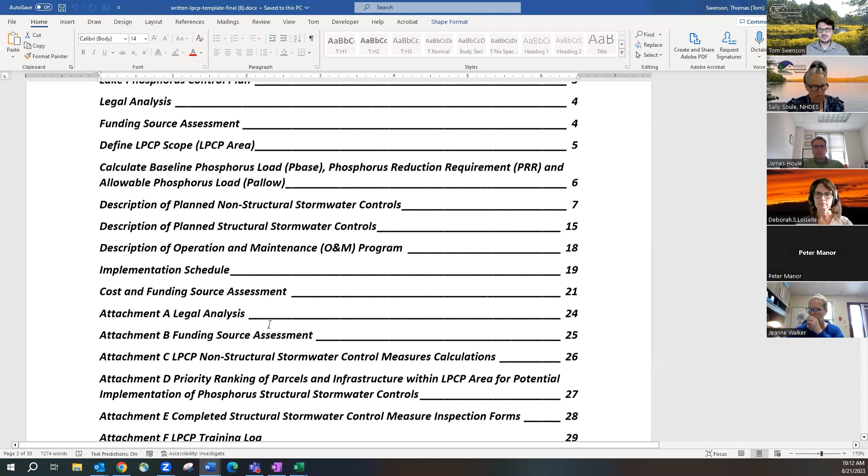And then we have our table of contents. And I wanted to point out in the table of contents that there are several attachments that we're going to ask you all to put with your LPCP, and we will reference them as we go through each of these requirements. But I wanted to let you know that there are a lot of attachments for this. Don't panic because we have resources for all of them, but we just want to make sure we're giving EPA everything that we have. And then again, there's that list of communities that are required to make LPCPs because they have phosphorus TMDLs.

It's also important to note that any red text within the template is either instructions or important information. This is just to give you some background information and to make everything easier for all of you. And we'll go into that more. This red text can be deleted once you're done with your LPCP template, or it would really just be your finalized LPCP plan. It can just get deleted from there. But for now, it's just there to give you all instructions and additional information.

Also throughout the LPCP, we're going to be using the terms non-structural stormwater control measures and structural stormwater control measures. These are the same things as BMPs, but we're just calling them stormwater control measures because that's how they're referred to in Appendix F. So we just wanted to make sure that we refer to them the same way within our template to make sure we're using the permit language.

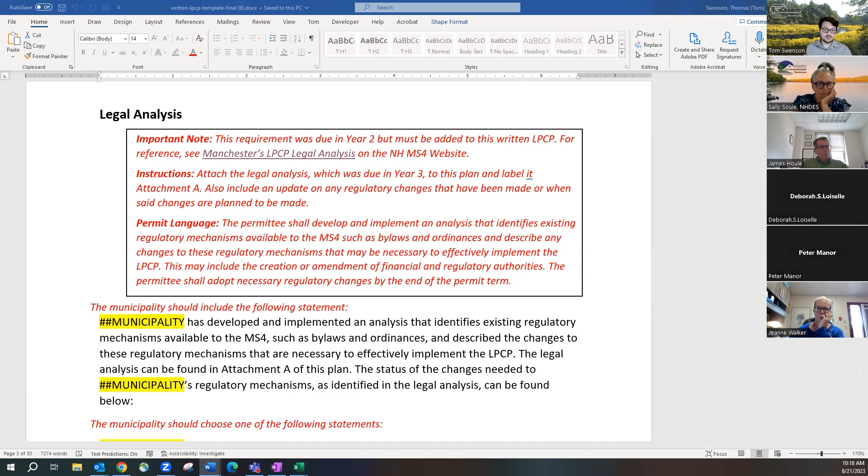And this legal analysis looks like this. It's on the MS4 website. You can follow it on the link. It gives you a good starting spot, and you can see what another community has done. So just a little background information in case you need it.

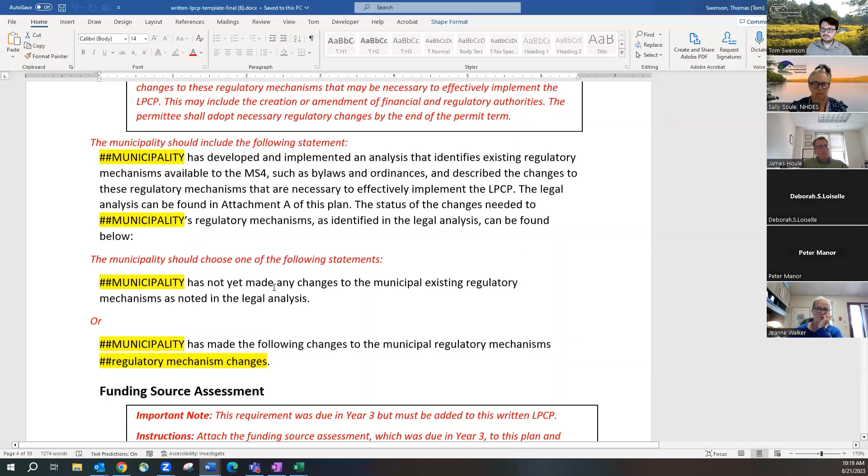And then we move on to the funding source assessment. So the funding source assessment was due in year 3. It's another one of those requirements that had not been submitted yet, but now they want you to submit it. And what you're going to do is take your funding source assessment and attach it as attachment B to your LPCP plan. If you have not completed your funding source assessment, the requirements are very vague within the permit about what is actually required.

So our suggestion is you just take the information from the cost and funding source assessment, which we'll get to later on, and just put some of that information in there. We did a more in-depth cost and funding source assessment later on, but this was a requirement for year 3. So if you need to keep it vague, that's perfectly fine.

All right, any questions thus far about the legal analysis or the funding source assessment? Those were all things that were due in the past, but again, communities might not have had a chance to finish them. Any questions?

All right, so now we're going to move into the defined LPCP scope area. So the LPCP scope area was due in year 4. It was something that we had to finish last year, but again, we are now reporting in on it. Sally Soule is going to go over this in a second, but I just wanted to show you, there's 2 options for what you can do for your LPCP area, and you just choose the language down here for whatever option you choose. So Sally, I'm going to throw it over to you to explain more about the 2 options.

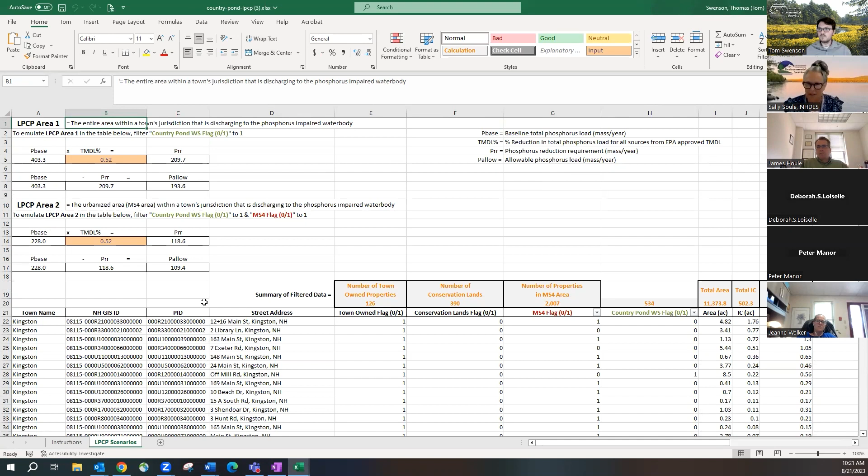Thanks, Tom. And Jamie can weigh in on this presentation as well, but the MS4 permit asks you to do two things. It asks you to choose an area in which you plan to implement your MS4 activities. And then, set some pollutant load reduction goals for tracking those implementation activities over time.

So there's two area choices that you're offered in the MS4 permit. Each town that has a lake phosphorus control plan requirement has a spreadsheet that does these two area calculations for you, so that you can see the numbers, so that everything is quantified for you to help pick which area you want to use for your LPCP area.

So when you go on the website and go to your town, you will see a link to this particular spreadsheet for your town. And Tom, remind me, what is this spreadsheet called? I think it's called LPCP area. Yeah, scope, LPCP, scope and calculations. Okay, great, thank you. So everyone who's got this requirement has one of these spreadsheets.

This is all based off of the hotspot data that UNH developed, that you've seen and worked with and loved through the years. So this information should look pretty familiar.

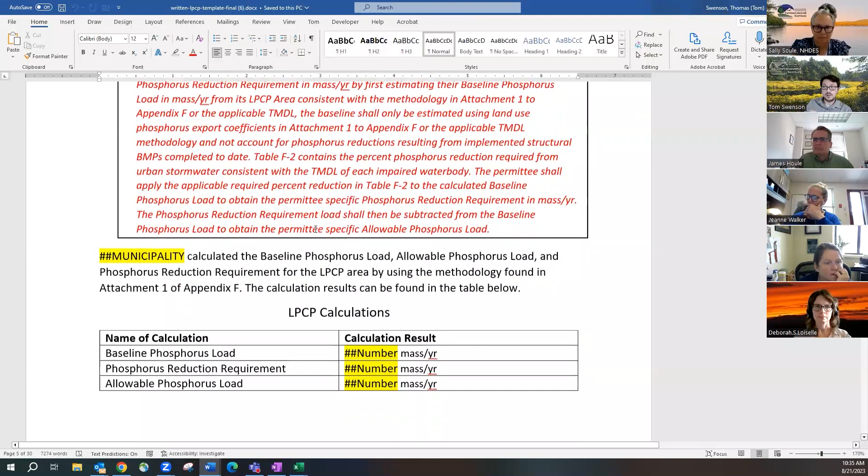For the calculations that Sally mentioned, that is the next requirement, which is to calculate the baseline phosphorus load, phosphorus reduction, and allowable phosphorus load, which is P-base, PRR, and P-allow. We do have a link to the permittee specific page telling you where to find this information, and once you find that, you're just going to put it right in here. So again, this was a year 4 requirement, but you want to make sure that you're putting your calculations in here so EPA sees it, and you just steal those directly from your spreadsheet.

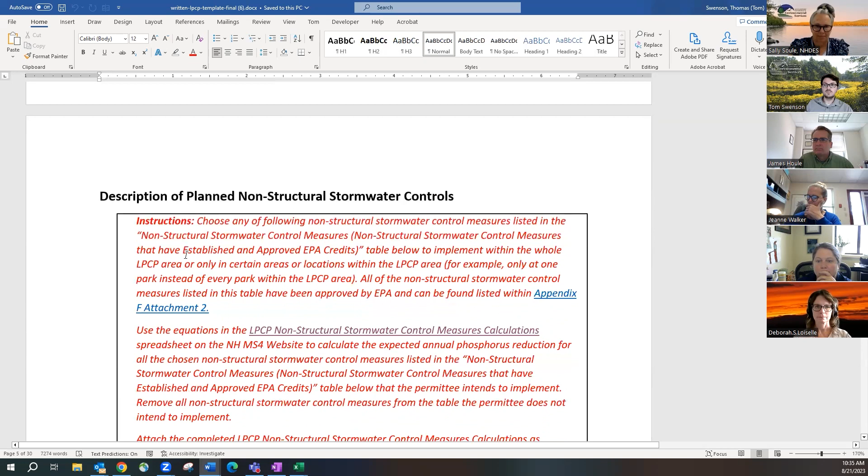All right, now we're moving into the newer things that we developed for this year, and this is where there's going to be a lot of discussion, and we're hoping to hear from all of you. So the next requirement is the description of the planned non-structural stormwater controls.

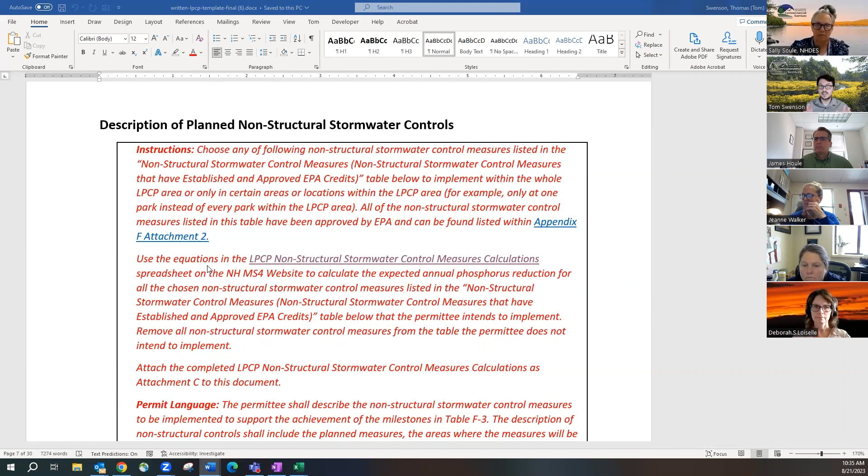As Jamie mentioned, everything we're doing is based off of what's in the MS4 permit, more specifically in Appendix F. All the non-structural controls come from attachment 2 of Appendix F, and we'll get to some more of those caveats in a second. Jamie's about to go through a spreadsheet that we have linked right here that has all the calculations he's about to show, and you're going to want to update that spreadsheet with all the calculated information and attach it as attachment C to this document.

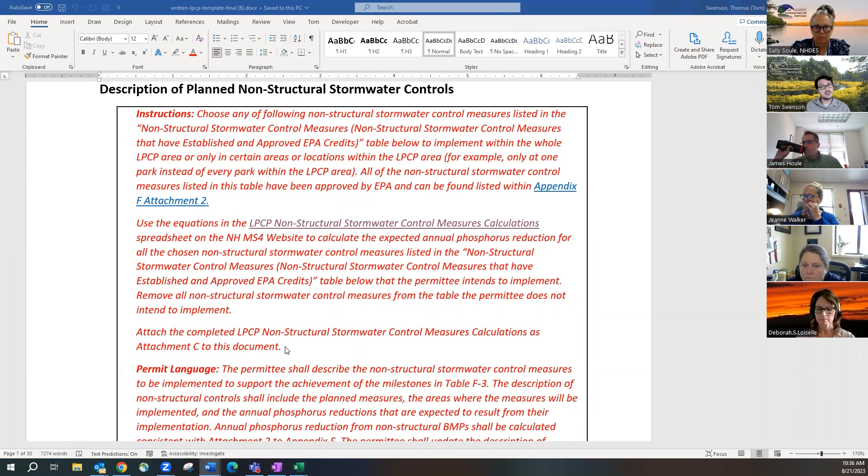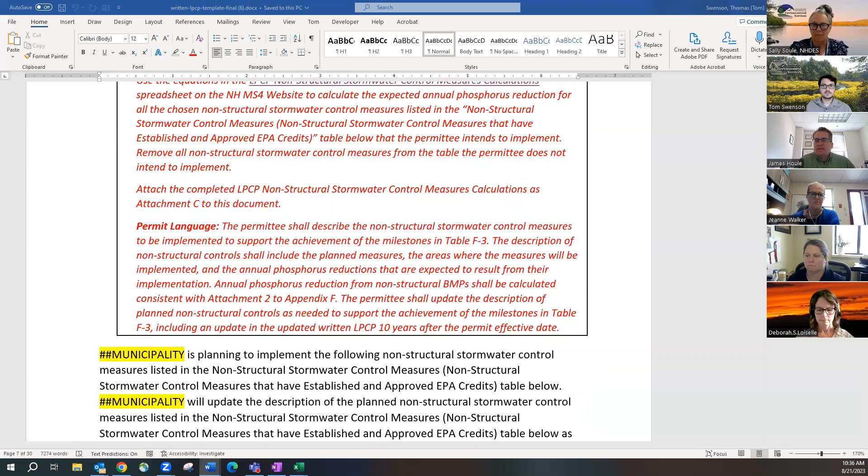So once you update your spreadsheet, make sure you save it and attach it to this document. And then once Jamie goes through everything, I'll go through the template itself and show you where to put all this information. Hey Tom, before we go into the non-structural stuff, can you go back to either Country Pond or Amherst? It doesn't really matter to me. That spreadsheet, yeah, just scroll down so we can look at the parcels.

So on the structural side, and it's possible we were getting here, all the baseline information is developed based on the existing land use conditions.

That PLO is kind of the background. And we're really trying to target the manageable phosphorus load. And when we talk about manageable phosphorus load, we zero in on impervious cover, because what impervious cover represents is the most amendable part of that load scenario.

We're not talking about going into, you'll see on some of these areas that conservation land has a phosphorus export. A forest has a phosphorus export. That's all part of the PLO. Nobody's asking you to manage the forest. What we're really focusing in on is the impervious cover and using non-structural strategies to supplement structural strategies that will be based on specific parcels.

And so what we've done here and what you're seeing is we've ranked the parcels in numerous ways. First of which, you'll see a town-owned flag. So town-owned lands have been marked. This is based on the best available information.

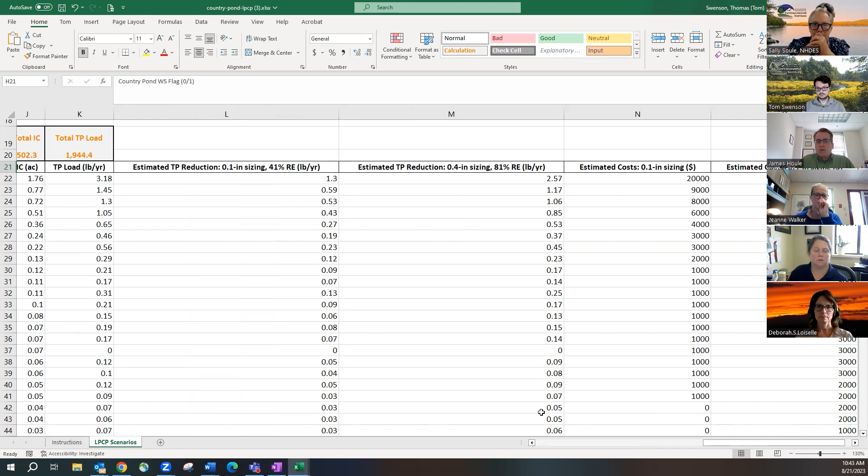We've been told, a DOT will tell us, your costs stink. And I completely agree, for a DOT these are low level costs. What DOT needs to do, because most of their implementation is going to happen in a highway setting, they're going to need a police detail, a traffic detail, and all the associated permits. They're not going to get away with anything.

So what we tell DOT is take this base cost and add a multiplier. If that multiplier is 2, great. If it's 10, which is probably more likely, that's how you begin to calibrate these costs based on your potential costs. So this is a starting point. As you implement these BMPs and say, wow, these were off by a factor of 2, now you add a factor of 2 to the future costs. So it becomes part of an adaptive projection.

So that's how we're really advising you deal with the structural controls. Create a list, and obviously for Appendix F, because you have a TMDL, it's a much higher bar. So in 15 years you're looking to get as close as you can to that reduction requirement.

So you're going to likely have to treat a larger percentage of your municipally owned lands. If you're under Appendix H for the nitrogen source identification report and the phosphorus source identification report, we do a projection and estimate of what you should be managing. So if you manage the top 10 municipally owned parcels, then you're managing 91% of the available impervious cover.

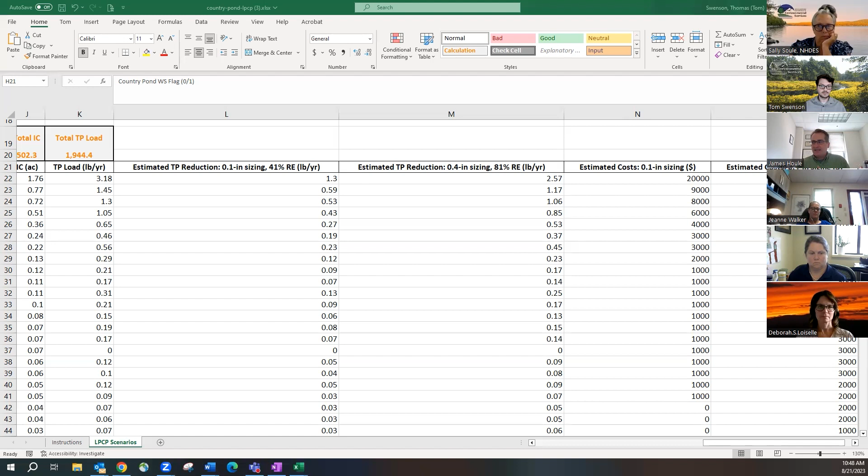The short answer to your question is, if we don't have credits that are existing, then we need to start working on these things. And that goes into the bin of future work products. We're taking this seriously. The way we're looking at it now is you have enough in the creditable section to get started, and when you're looking at implementation, pick off a couple of structural controls, put that in your plan, retrofit a couple of your municipally owned lands. That can only help, and it can demonstrate work towards TMDL compliance.

When you look at non-structural controls, we'll talk about the top ones that have credits now, where there's no real downside to maximizing the benefits. But there's also a later list of things we think will eventually get us across the finish line but have no existing credits, like septic system retrofits, which we're working on right now, or phosphorus inactivation, which is a whole new territory. It's not that you can't put that in your plan. EPA allows you to put things in your plan, and if there are projections for those load estimates, reference those studies and sources. If that's something you're serious about, by all means put it in your plan.

What we're talking about now would be the low-hanging fruit, the beginning of the journey—structural controls that have credits and non-structural controls that have credits. And Jamie, when you say 'have credits,' you mean these are credits outlined in Appendix F of the MS4 permit, so those are the credits EPA already considers legit.

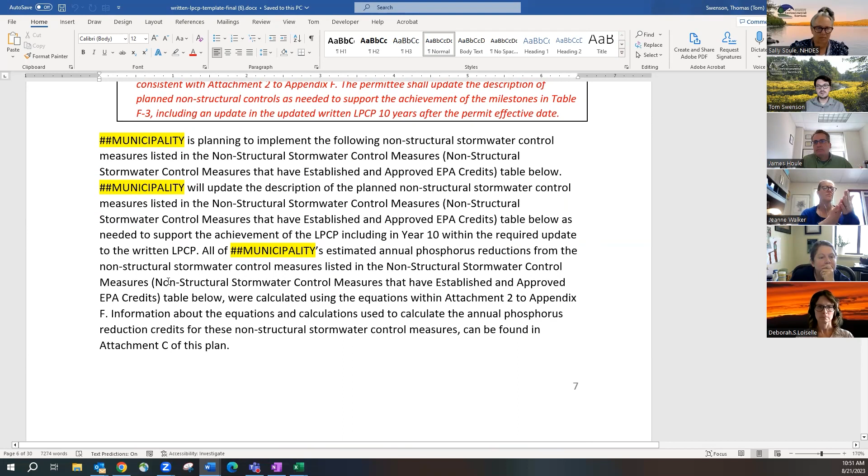With what Jamie just went over, we have this list of the first category of EPA approved or already authorized credits, which are catch basin cleaning, street sweeping, leaf litter management, turf grass fertilizer management, and impervious disconnection. If you go into the template itself, in the non-structural section, you'll scroll down and this first paragraph explains how we chose these non-structural controls, that they have EPA approved credits. You'll see a table with all the potential non-structural stormwater controls, or BMPs—interchangeable terms here.

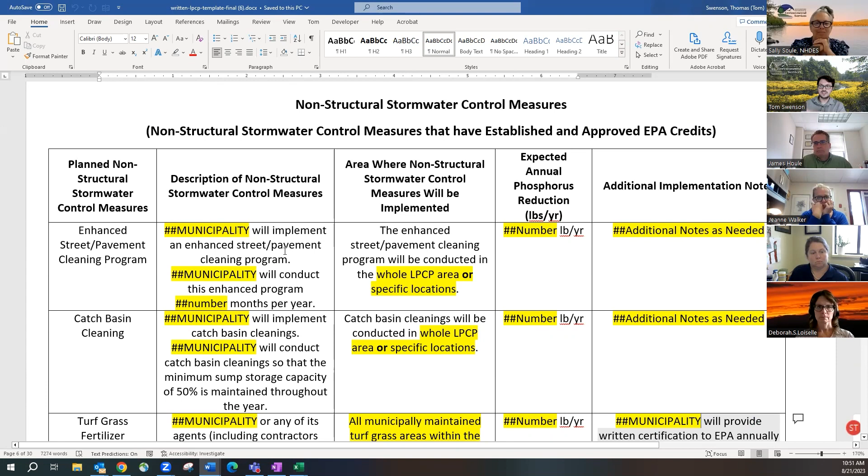There are a few more details for each of these you'll want to pay attention to, but you can choose which ones you're implementing. A lot of these might already be things we're doing within our MS4 communities, but we might just have to take the extra step. Like catch basin cleanings, for example, we're already doing that. The street sweeping program, you're doing that, but there are a few extra requirements there.

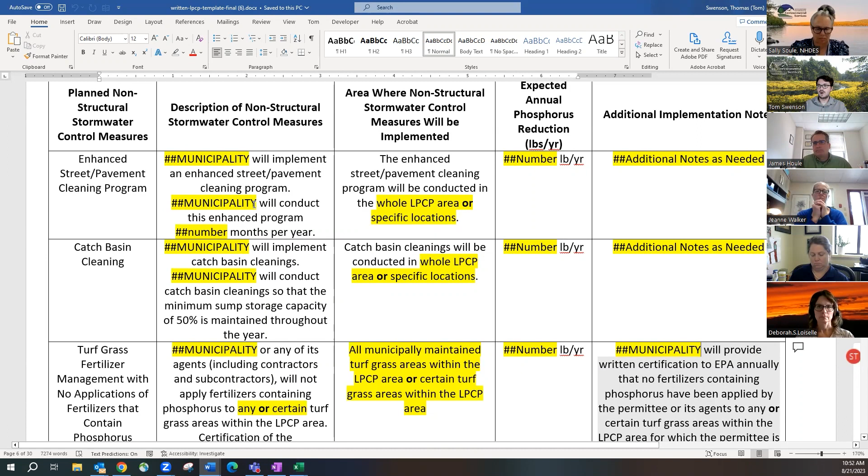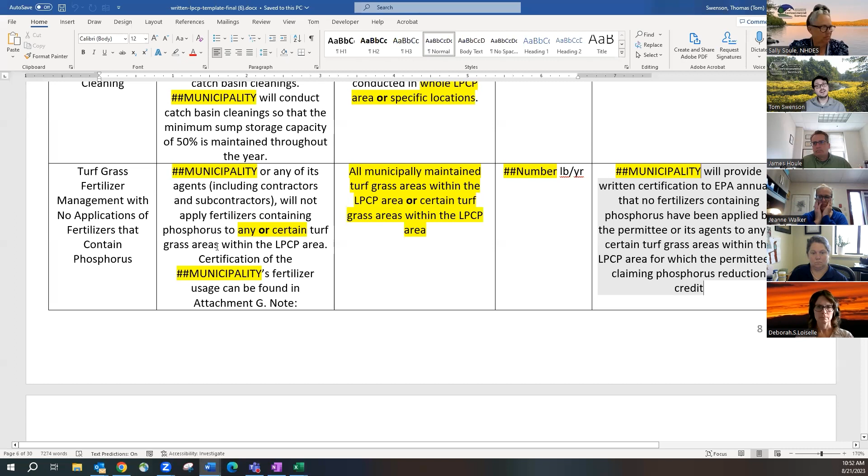I know a lot of us already have fertilizer SOPs in place or processes that say we're not going to use fertilizers that contain phosphorus. Well, you can get credit for that. As long as you're using a fertilizer that has less than 0.67% phosphorus, that's considered a fertilizer containing no phosphorus. So these are additional things you can get credit for.

And then, yep, so the leaf litter, all of that. And then also in the spreadsheet, Jamie was talking about those ones that are BMPs or non-structural control measures that don't have EPA credits attached to them, but we're hoping to get that in the future. So that would be the shoreline buffer, for example.

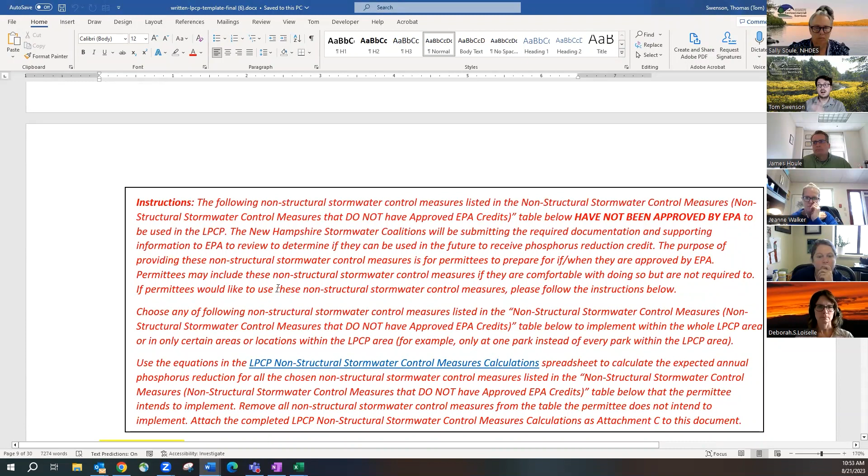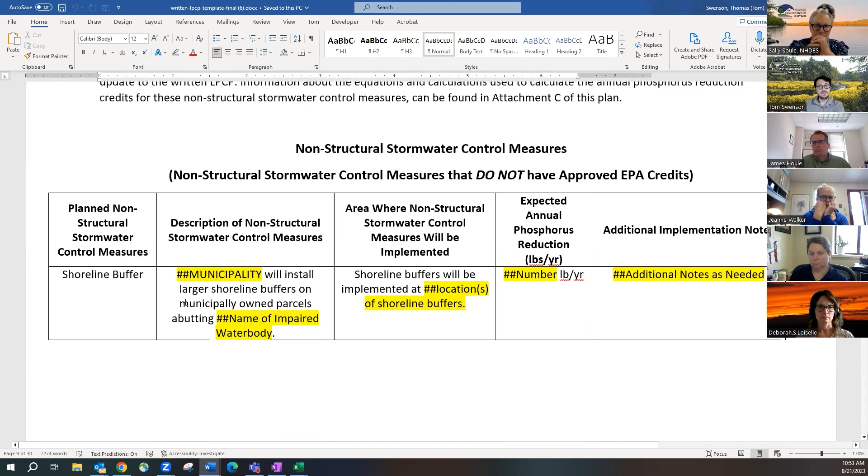And if you scroll down within the template, you're going to see another instruction screen talking about putting in those non-EPA approved non-structural control measures. Same text explaining why we're putting them in there, and then you could put the shoreline buffer in here. And then the last group.

Yep, sorry, Jamie. It's not a case where it's approved or not. It's just that they don't have established credits, right? So these types of things are known to reduce phosphorus, but there hasn't been consensus around an actual credit. Like, we haven't been able to develop consensus around what an outreach and education program does to reduce phosphorus, just because they're so varied and so diverse.

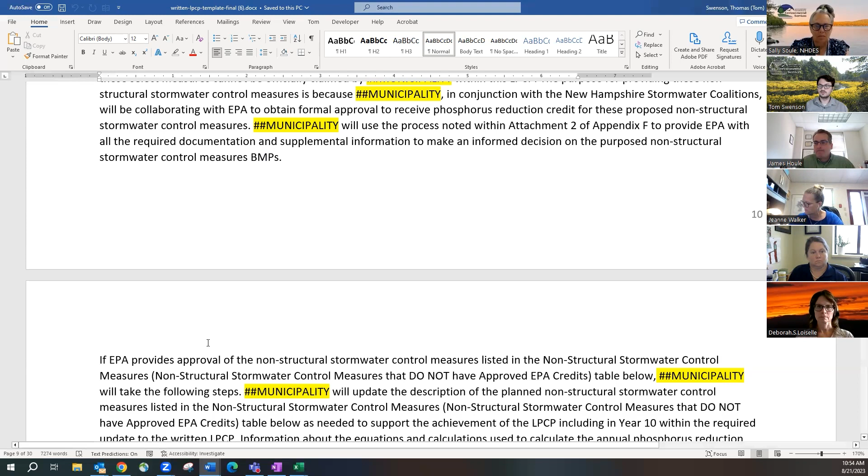However, if something holds promise and you really want to explore something, find those resources that are out there, propose a credit, and that's where you just have to get a little bit more creative. Yep. Yeah, and for the shoreline buffer, if you wanted to get credit in your LPCP plan for this, you would just have to submit data to EPA. And this is something that maybe we can look at within the stormwater coalitions too. If it's something we feel strongly about, we can pull that information together and submit it to EPA to make sure they approve of it.

And the last category, so there's 3 categories. There's the EPA approved, there's the not EPA approved but it has some sort of phosphorus reduction attached to it. And then there's this third category, which are not EPA approved and don't have a phosphorus reduction. But like Jamie was saying, we don't know how to quantify that, like for your septic system replacements and stuff like that. But it is something that you are doing, and EPA should see that you're putting the time and effort into. So you've got your pet waste education and outreach, your septic system education and outreach.

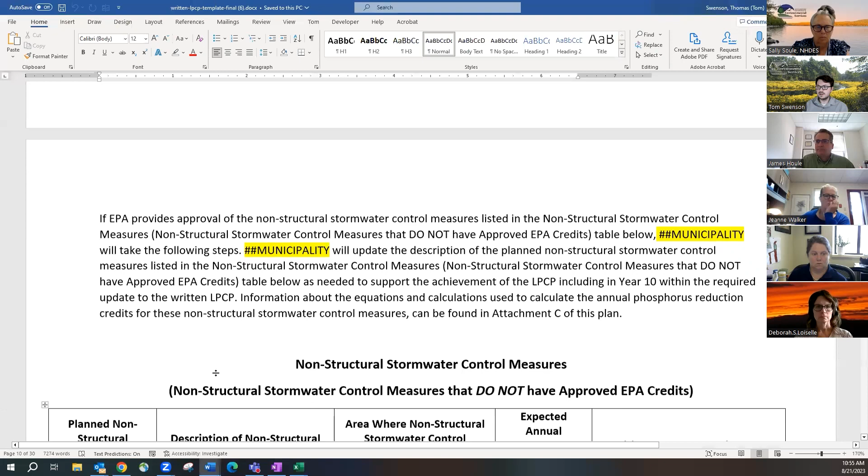If you're converting vehicles into electric, stuff like that, we have put another section down here that you can pick and choose what you want to do. There is no pressure. If you don't want to use these, it's completely up to you, but we wanted to give you the options, because if you're doing it, you should be getting credit, or at least make EPA aware of everything that you're doing.

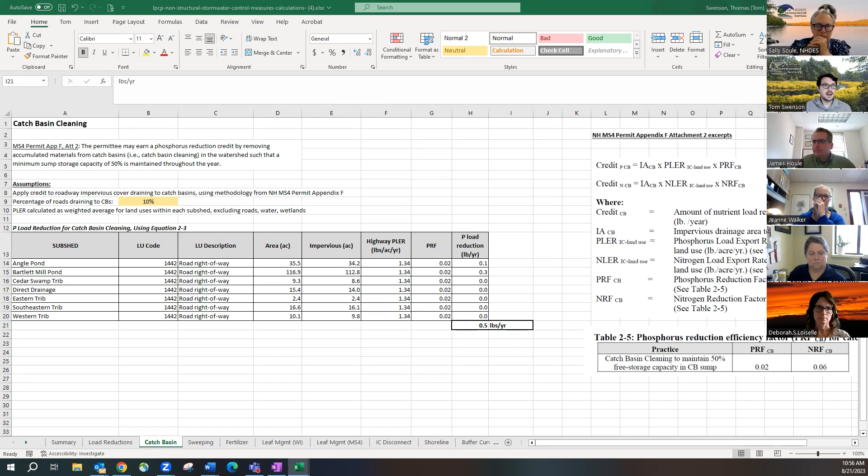Oh, and then the big thing, Jamie, can you go over the calculators? I just realized that was also in the spreadsheet. Yeah, so for non-structural, what we've added to that spreadsheet are the sources where we're getting the credits from. And for the most part, catch basin cleaning, those credits are outlined in Appendix F, and we're adopting attachment 2 of Appendix F.

We're adopting those. For the street sweeping credits, we have a new technical memo out on load reductions, phosphorus and nitrogen, from sweeping activities. And we've referenced that in that spreadsheet. We have a technical memo that you can read that tells you exactly how to calculate it. We don't have anything currently as slick as the structural control calculator. That's just a lot easier. There's a lot more information needed on the non-structural side.

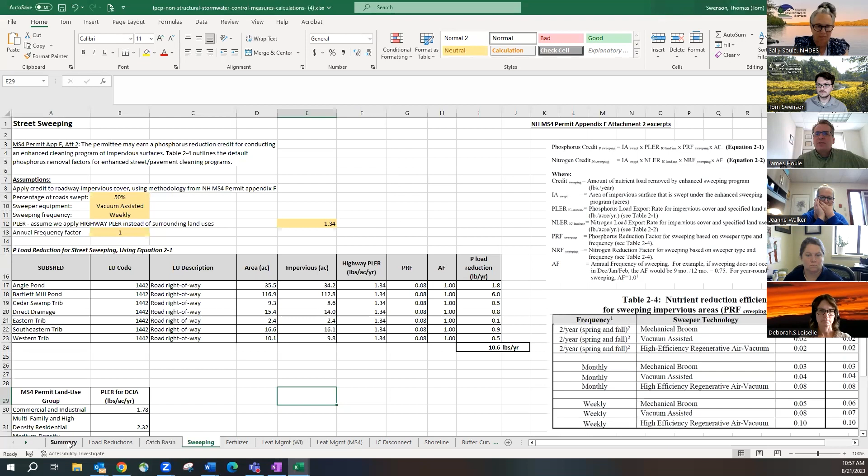So again, catch basin cleaning, pretty easy. You need the number of catch basins cleaned or the drainage area associated with the catch basins cleaned. And we're following what's outlined in Appendix F to calculate that. So we're using those standard pollutant load export rates and the standard reductions associated with that BMP.

For street sweeping, it's gotten a little bit more innovative. We now have an updated model credit and an updated measured credit. So if you pick it up and you can estimate the volume, you can get credit for the load reduction for fall seasons and non-fall seasons. So unfortunately, we don't have a slick calculator that you can just plug the numbers in, but all the references are really outlined here. Jamie, I was looking at these, could they use these catch basin?

So these are estimates we probably developed for Country Pond. For the catch basin, yeah, if you can identify the drainage area and the impervious acres associated with the drainage area that your catch basin network drains, then you can use this approach. You just use like a medium density load export, and then you get a phosphorus reduction for cleaning catch basins out, meaning that no more than 50% full, you get 2% load reduction.

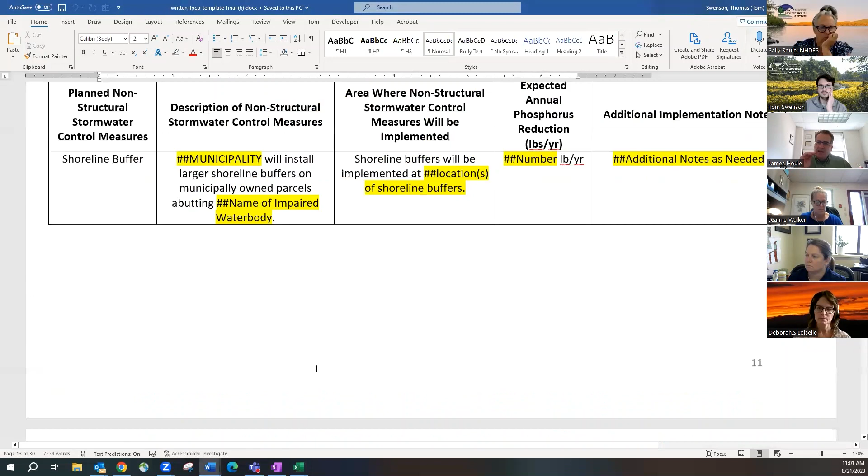So make sure you're going through and choosing whatever non-structural mechanism, stormwater control measures. And I would just say the key here is not to get too distracted by the load reduction. That's a best estimate, right? But really think feasibly about what it is that you could implement and really put that on paper, because we can always do, and Sally's really good at this, I'm getting really good at this, a lot of calculations with the existing resources to do an estimate.

So let's say you worked on this plan and you know that you want to do shoreline buffering. You know that you want to do enhanced sweeping and you want to do catch basin cleaning, but you're having trouble estimating the load reduction. If you can come up with those units and your best guess at those units, it's really easy for us to get you across the finish line with an acceptable load reduction. So I guess we'll leave it at that.

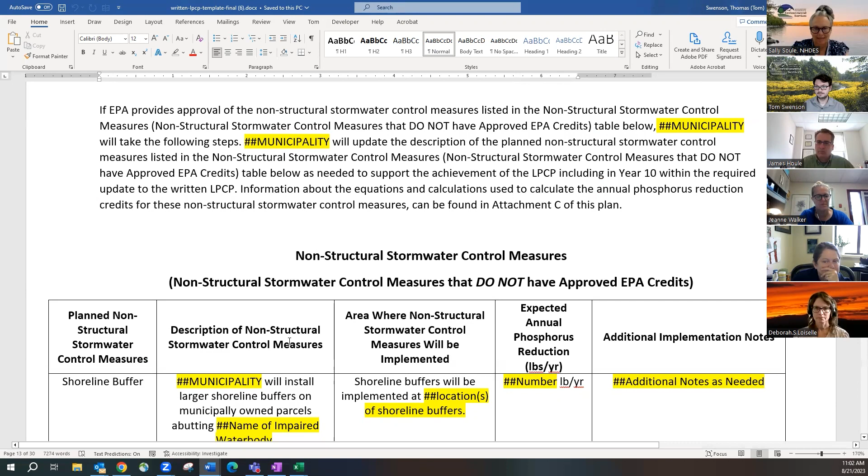All right, any questions related to that? A lot of options in this section, so just do what you feel comfortable with or what you're already doing or what you could implement. And I hope I'm not beating a dead horse, but I think the key for this plan is to demonstrate that you're trying to do a little bit of everything. So you're going to retrofit a number of your parcels that you can identify with structural controls, and you're going to implement as much of the non-structural stuff as you can do.

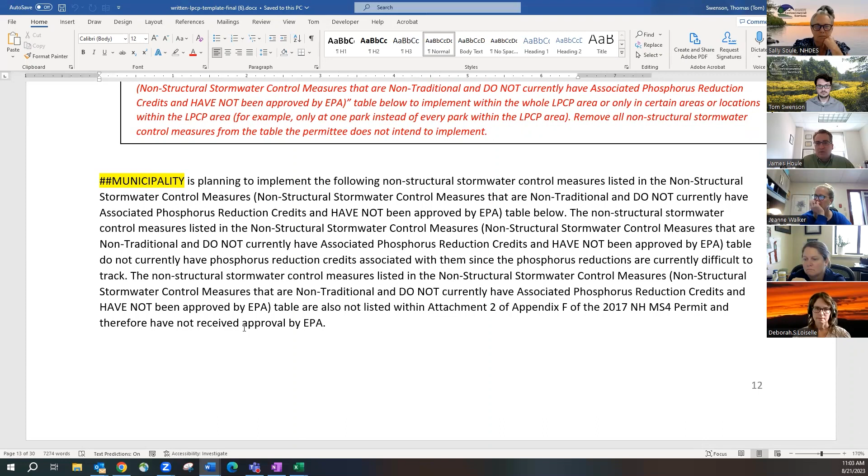And then you're thinking about some of the creative stuff like flow controls or septic pump outs, and a range of other things that likely are going to be necessary to get you across the finish line. But this is a starting point. And this is a living, breathing document, like everything we do. So this will change. You will update it as you're like, oh, I couldn't implement this, or I did implement this, this was way easier than I thought. So it'll be something that's updated, like I mentioned before.

Yeah, we just updated the non-structural control summary table for this process since we did it in Country Pond like 2 or 3 years ago, and there's already been advances in what credits are allowable. So this stuff is exciting and it's changing. Awesome. And we'll keep you guys apprised, like Jamie said, as things change and we learn new things. This will be something that we update you on yearly. So the next section is the planned structural controls.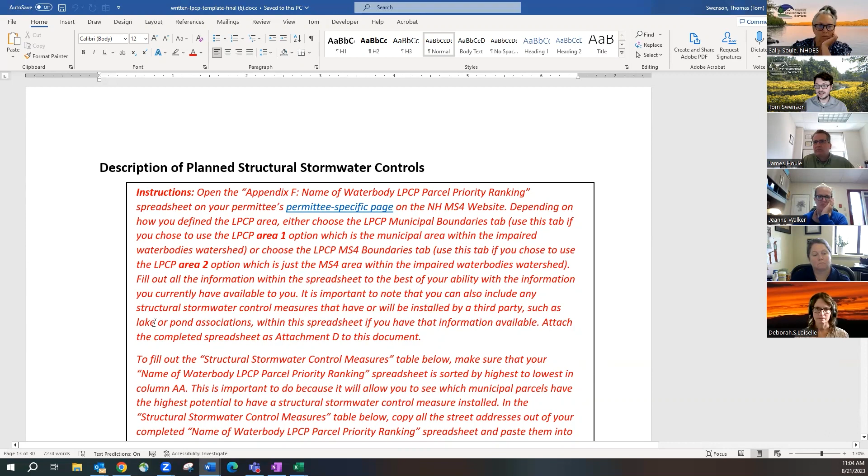Jamie already started to hint at this, and then we'll go over it in detail. If you go to your permittee specific page, I'm going to go back to Kingston because that was the one that we were using. Jamie was talking about those parcels that fall within the MS4 area or within the watershed, depending on what version of the LPCP scope area you choose.

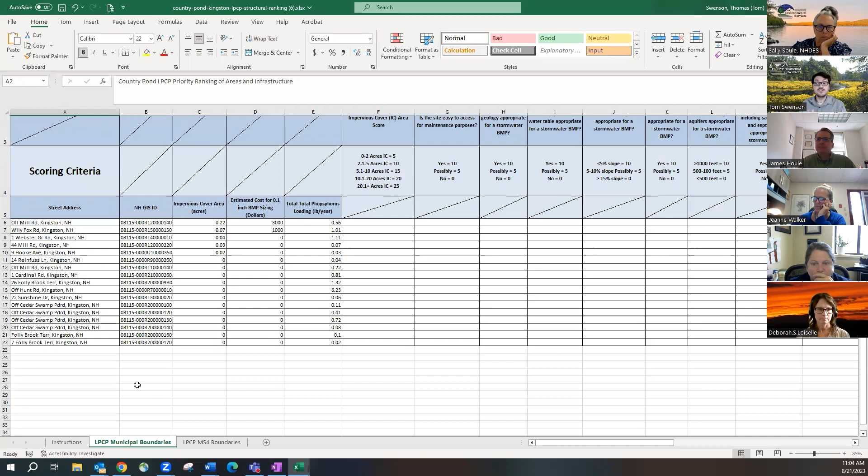If you go into your water body LPCP parcel priority ranking, we've done this for you to try to make it easier. This first option is the LPCP municipal boundary. This would be option 1 for your LPCP scope if you're choosing the whole drainage area, the whole watershed of this water body. Or the second option is just the MS4 boundaries, if it's only the watershed that falls within your MS4 boundaries. So that is on the MS4 website.

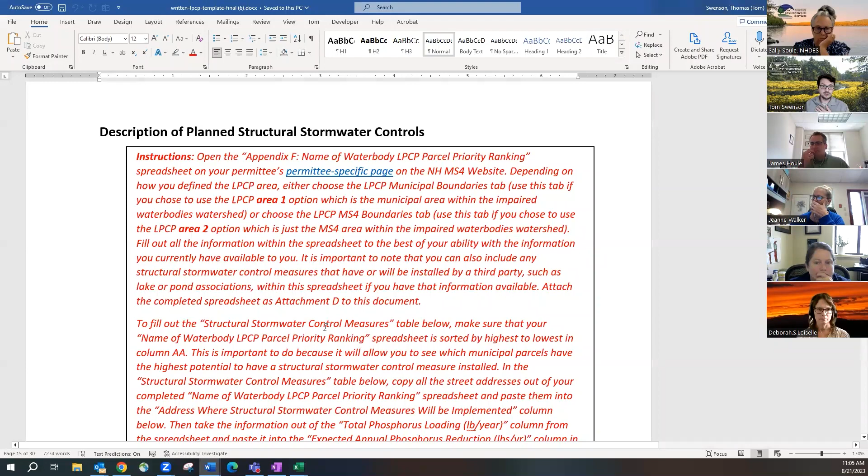You're going to want to complete this spreadsheet with all the information. Let me pull back up that spreadsheet. Complete the spreadsheet and then attach it as attachment D to your LPCP plan. And Jamie, I'll throw that back over to you to talk more about the specifics of it, but that spreadsheet does exist for when people need it.

Yeah, sorry, I jumped the gun on that. I always think in my head structural and then non-structural, like in a sequence, but it's a weird order. It really is.

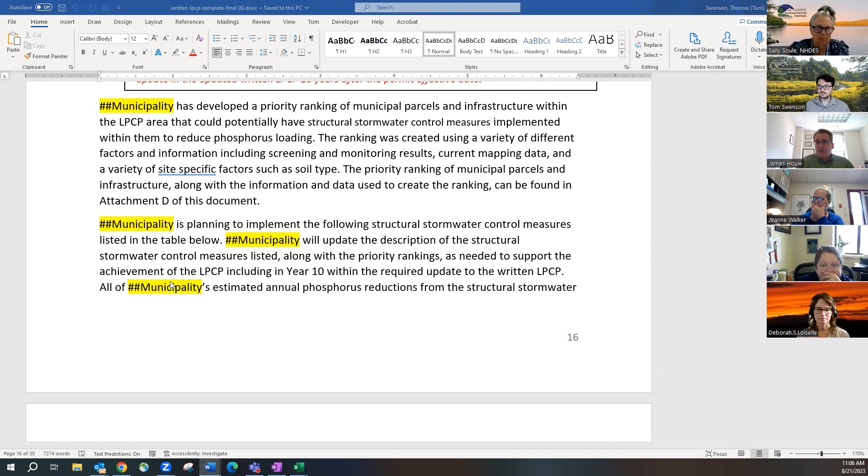So I think we kind of covered it. We covered how those numbers are being generated, some of the choices, and what Tom is referencing is DES has already developed these spreadsheets that rank your top properties by impervious cover. So here in Kingston, if we're looking at the whole drainage area, we're focusing in on only a handful of properties here that are actually available to be retrofitted.

So in this particular instance, you'd be looking at Mill Road in Kingston and then Wily Fox Road in Kingston. So 0.22 acres of impervious cover and 0.07. I don't think we generated costs for anything else because it's really not that economically feasible. And I don't know how this is populated. Was this populated using the 0.1 inch? Yes, we did the low hanging fruit in terms of cost. Okay. Yep.

So if you wanted to update this and do more area, you could use the 0.4 from that other spreadsheet and just manually input it. And a question here, Christine Binger. So just from practicality, you're saying if we can infiltrate whatever comes off that road into a basin or vegetated swale, then we could get the credits. I mean, is that the BMP?

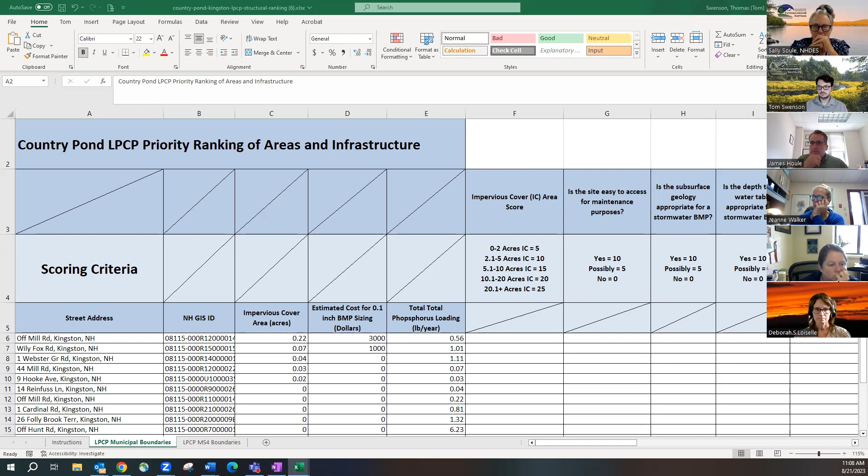The structural BMP, when you're talking about a roadway like that, you're just talking about taking that storage and putting it underground and not letting it run off. Right, yeah, we modeled an infiltration style system. So I would say if it was a swale, you'd want to modify the swale to have a stone reservoir underneath so that you could capture and infiltrate that water. Okay, thank you.

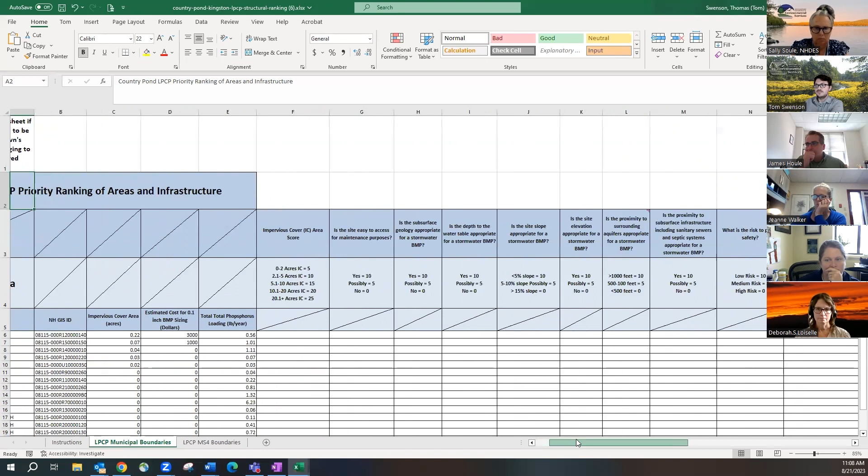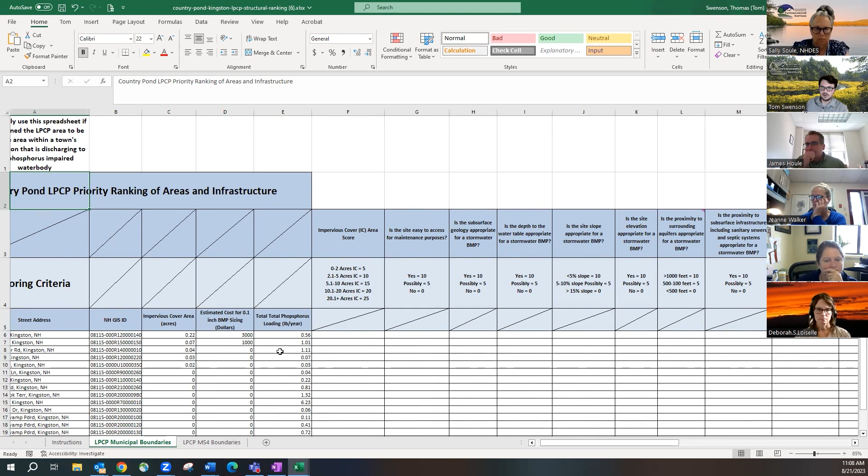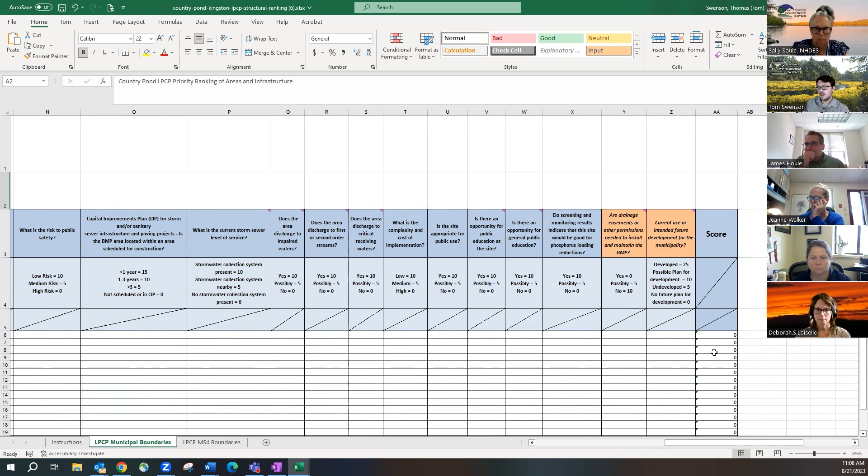And then also looking at the spreadsheet, we had to do the inventory and priority ranking of municipal properties in 2.3.6.E within the permit. Surprised I remembered that. We took all of these feasibility questions and put them in here. So you can go through each of these parcels that have some sort of phosphorus loading potential and answer these questions, some of which you might have already done if there's overlap with your inventory and priority ranking of municipal parcels from MCM number 5, and then you'll get a score here. And you can filter this score from highest to lowest.

This just talks about how we did all of what we did, and that you're making a plan, and you're going to fill out this table. You'll put your priority rank, which you'll get directly from this spreadsheet, so 1 through whatever your number is. You'll put the BMP that you intend to install, the address where you intend to install it, which is also from this spreadsheet, the expected phosphorus reduction, also from the spreadsheet, and any additional notes you have.

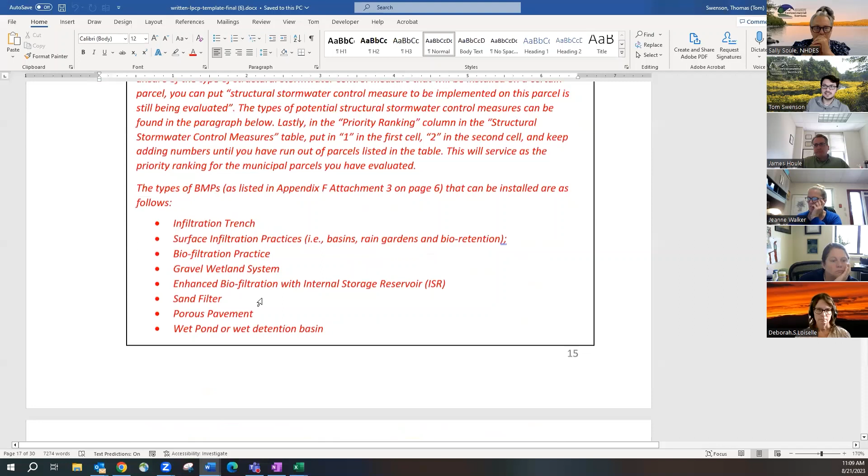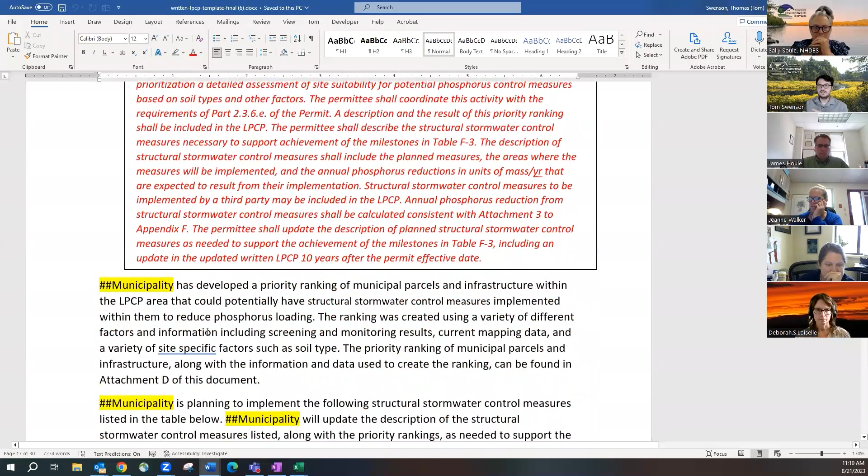And you do have a wide range of BMPs available to you. The list is up here in the instructions. They list specific ones in attachment 3, and it probably covers almost everything you would be doing. If you have a question about where something falls, feel free to reach out to Sally, Jamie, Deb, or I. I'm not the most expert on BMPs, but we can definitely get that information for you. So read the instructions, see what your options are, and fill out this chart accordingly.

Any questions on this? This one's a little more straightforward, takes a little bit more thought. I'm like, hey, what could I do? And obviously nothing is set in stone. So if you say you're going to put in, I'll use Rain Garden as an example, at Old Mill Road or whatever, it might change. We've made note of that as well, that nothing is set in stone and things will be updated as time goes on.

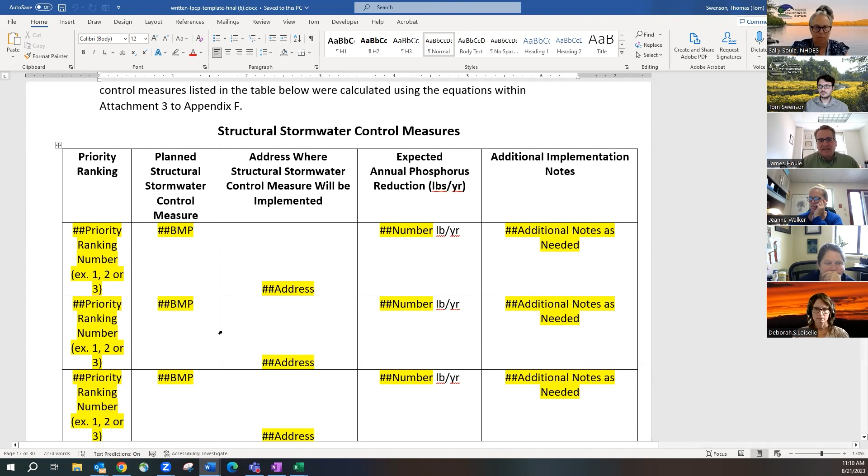This is one of the things we differentiate as you move into implementation. This component of the process becomes less and less important. This is just fantasy land. You're trying to project the most that you can do and project the largest load reduction. But as you implement, everything's going to shift to, once you have a system installed, it's really hardwired the credits that you're going to get. So you can be flexible here, and be back of the envelope.

A lot of these resources exist. I'll put in the chat. We have a BMP calculator that we developed using all the machinery and the accounting machinery in Appendix F. You can use Appendix F with a pencil and a ruler, and just look at the feasible area that you can manage through that range of 10 different structural BMPs, or you can use the estimates that we provided that essentially assume 0.1 or 0.4 inches of rain from impervious cover into your infiltration style system. Any additional questions on that?

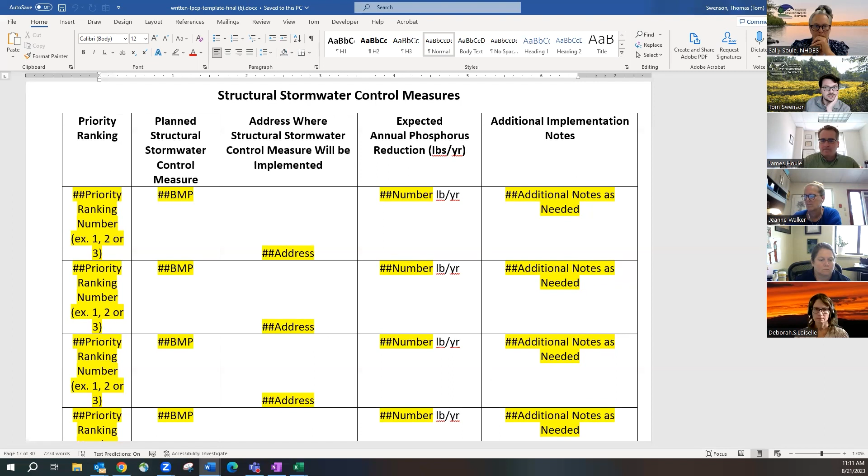The only thing I would add, and that list looks intimidating, like, oh, there's so many factors. But for Kingston, you have 2 sites, and the feasibility is going to be, okay, one is we can definitely do something there, and two, we'll try to do something there as well. In some areas, you're going to have much more options, and that ranking order is going to be more important. Is it highly sloped? Well, that reduces the feasibility. Are there existing structures on site? Is there an area of high groundwater? That could reduce the feasibility.

So in some areas, that list is going to be really, really important. In other areas where you'll only have 2 properties, you're going to do what you can in those 2 properties. We do apologize, it's just how the watershed went down. Sometimes you're going to have 10 to 15 parcels that you can work with, sometimes you're going to have 2. So just make sure you look to see what you have.

So the next requirement is another requirement that's new to year 5, and it's the description of the operation and maintenance section. Jamie's going to go over this in a second, but I wanted to show some additional resources. We're going to talk about inspection forms, and all inspections that you do on your stormwater control measures, you're going to want to attach as attachment E to this LPCP plan.

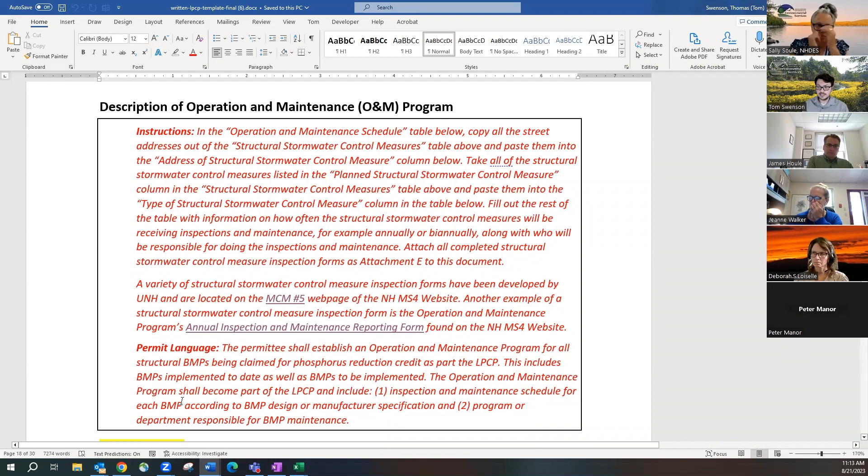We do have several inspection forms already created. If you click these links, they're going to bring you to the first one. It's going to be the MCM number 5 page. And right down here at the bottom, there's going to be a list of all of these really nice BMP inspection forms that UNH made.

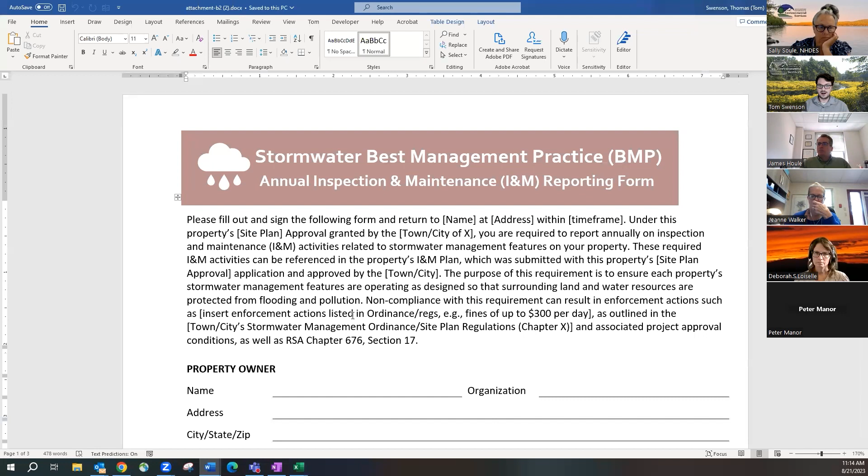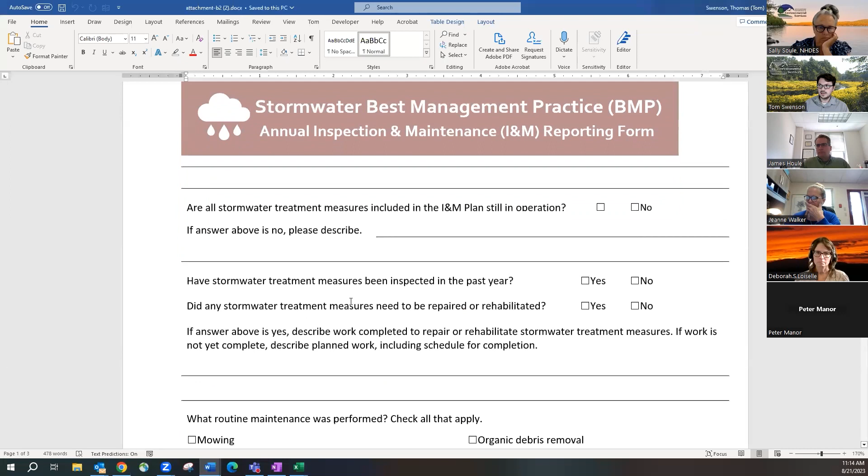So look through there. And the other option is within our municipal MS4 operation and maintenance program packet that VHB put together for, I'm pretty sure it was Dover. If you scroll down, you're going to see there's more of an inspection form here too. So you can choose which way you want to approach this. But Jamie, I'm going to throw it over to you to talk about operation and maintenance.

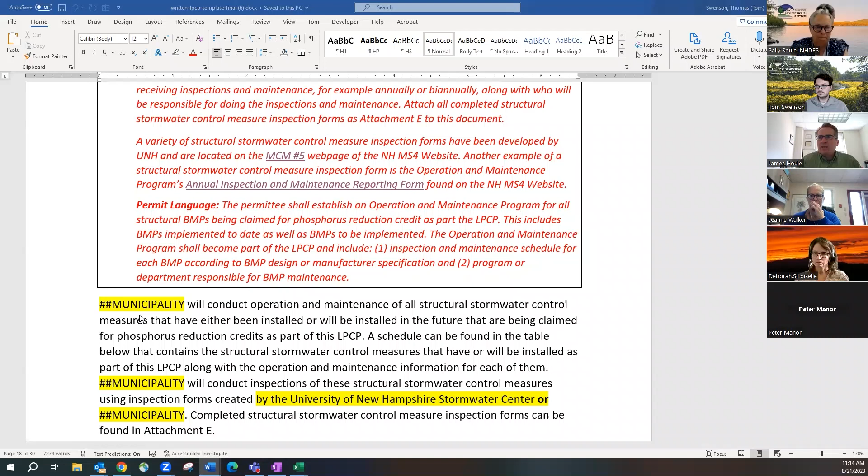Operation and maintenance is a requirement here. Again, if you haven't fully implemented, there's not a lot to do. It's possible you want to assess some of your existing BMPs, which I'd recommend doing as part of your feasibility assessment, looking at those properties identified as municipally owned land that already have structural controls.

I would recommend going through an inspection and maintenance protocol. We have that on our website, and I'll provide the link again in the chat. Operation and maintenance is really one of those things where we've evolved our thinking.

When I first got into the business two decades ago, we were writing 30-page operation and maintenance plans, and we know exactly where they went. I think Bill Belanger calls those shelfies - that type of plan nobody reads. It goes on the shelf, and that's about its life expectancy. We then came up with these...

1-pagers that are a little more comprehensive, but still talk about a range of different things you may or may not be doing. We finally settled on a visual inspection, like a drive-by inspection. We've actually had success getting students and other people with a range of aptitude at assessing the integrity of these systems to come back with good information we can use to update our asset management system and develop maintenance orders with.

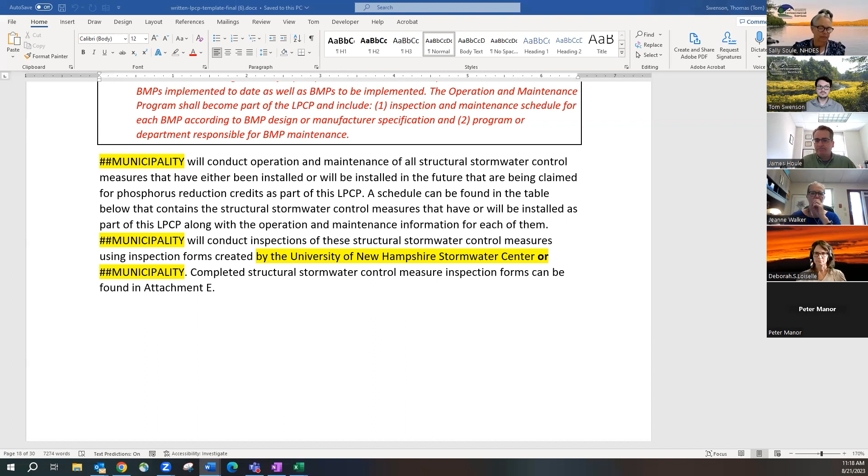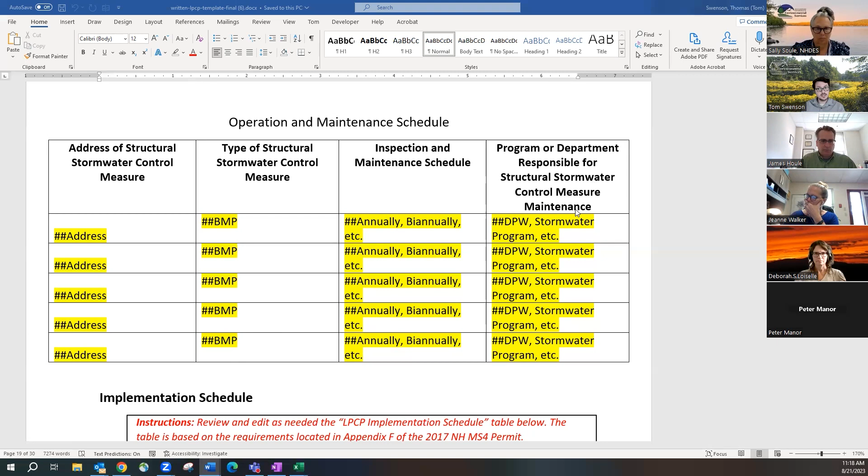Thanks, Jamie. And like Jamie mentioned, you can keep this vague - you don't know how you're going to approach this, but they do want a schedule. So you can just put the address of the structural stormwater control, which you can find in the spreadsheet we just looked at, the type of stormwater control you're going to install, and then an inspection and maintenance program. We suggested annually or biannually.

That's going to change, but just get something on paper, and who is responsible to do those inspections. I know we're running close on time, so I don't want to go too far over, but any questions about that? All right, feel free to speak up if you do have any.

This next section is a new requirement as well for year 5, and it's the implementation section. Before we go into it, one of the implementation tasks is training. To help facilitate that training, we created an LPCP training log. If you click that link, it's going to bring this up.

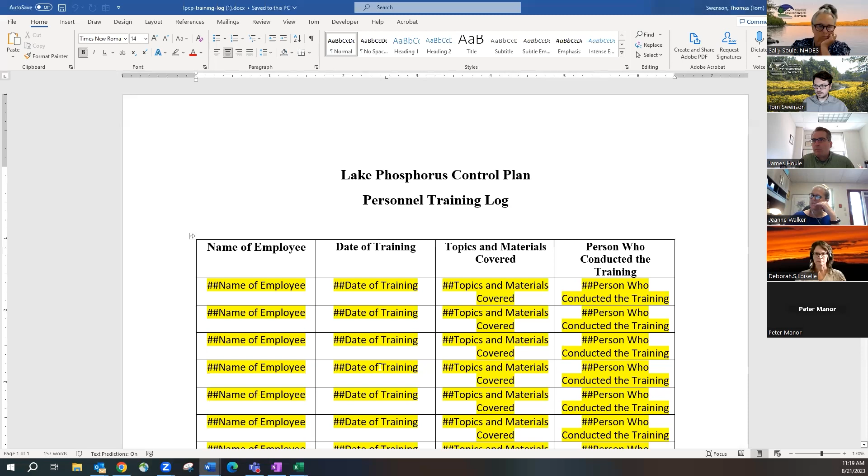This should look familiar if you have a chloride impairment or TMDL, because it's very similar to what we used. They basically ask that you keep track of what training you are doing. So this would be your LPCP personnel training log - just record the name of the employee, the date of the training, the topics and materials covered, and the person who conducted the training.

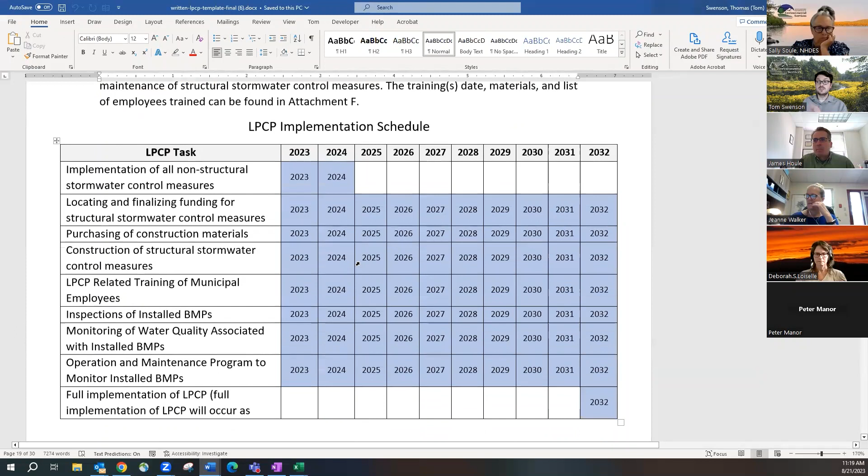So I'm going to get into the schedule next. There was a list of tasks that EPA wanted completed, such as implementation of all non-structural stormwater controls, which has to be done by the end of year 6. We kept it very vague. As you can see, locating and finalizing funding for structural stormwater measures spans all 10 years. We kept it vague because we wanted to make sure we weren't locking anybody into something they weren't ready for.

Everyone's going to approach this LPCP at a different rate. Some communities might have more resources, some might already be further along. So we kept this very vague, that way you weren't backed into a corner.

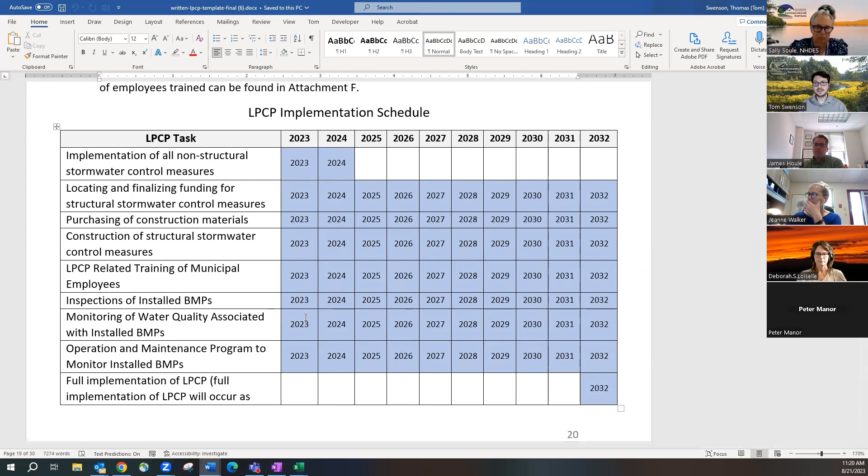Like the purchasing of construction materials, construction of stormwater control measures, it's very vague. Feel free to manipulate it if you want to, but we suggest you leave it this way because it does meet the requirements and does not commit you to anything that you don't have to do.

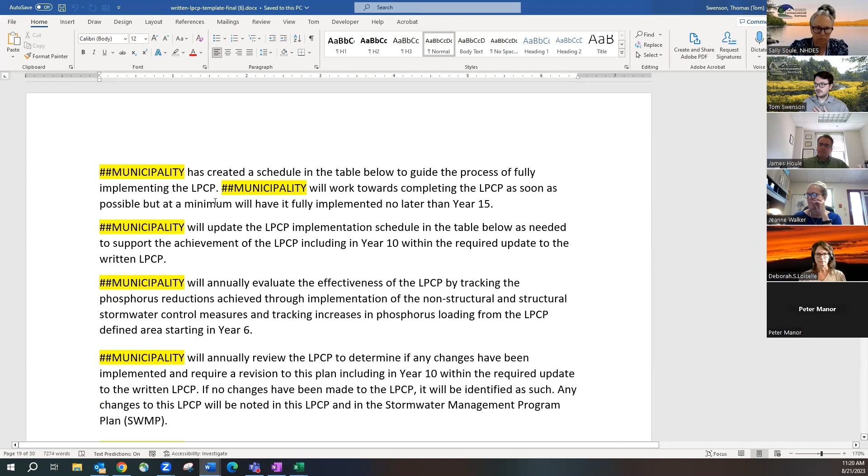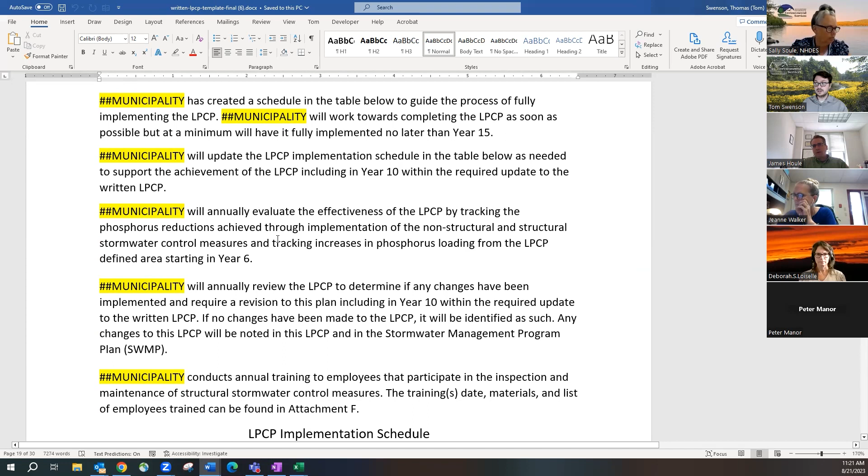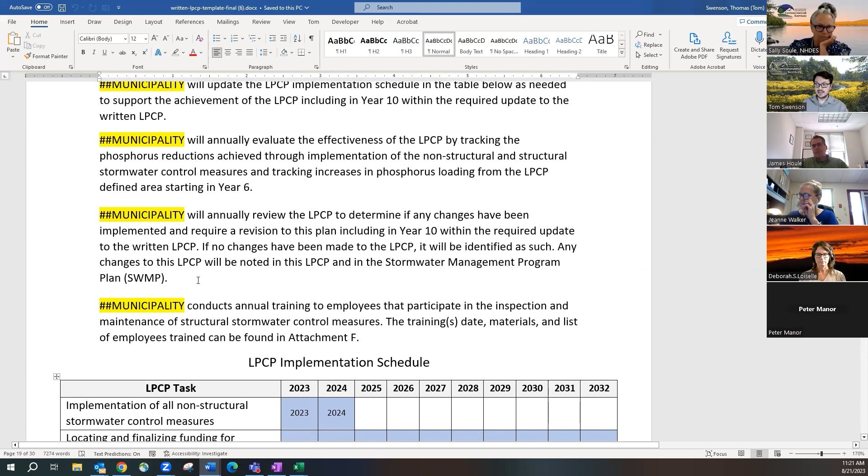There are some important things to note here. This just talks about the schedule we created, about updating the LPCP implementation schedule as needed as things change, including in year 10 when that update is due. Evaluating the annual effectiveness of the LPCP by tracking the phosphorus reductions achieved through implementation of the non-structural and structural stormwater controls. An annual review of the LPCP to determine if any changes need to be made and noting any that are made or aren't made. And then the annual training to employees.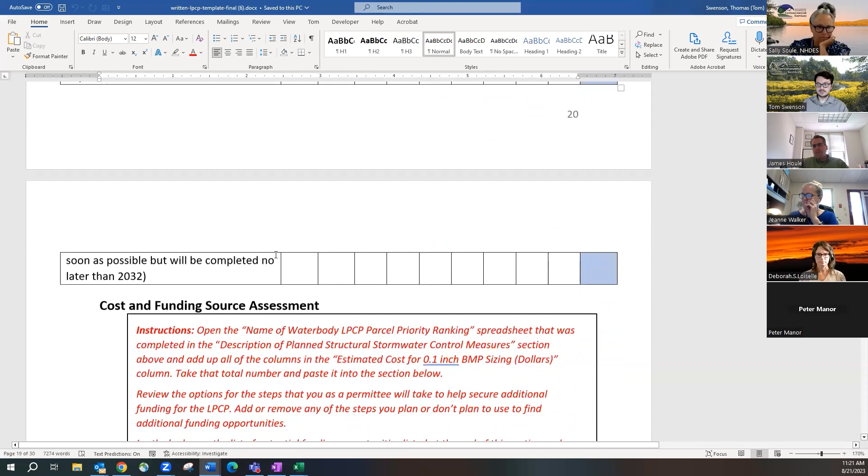So the implementation schedule is pretty straightforward. Again, please feel free to take a look through it. I'm just going to move a little faster because we are running low on time because we're having great conversations and going over some really key things.

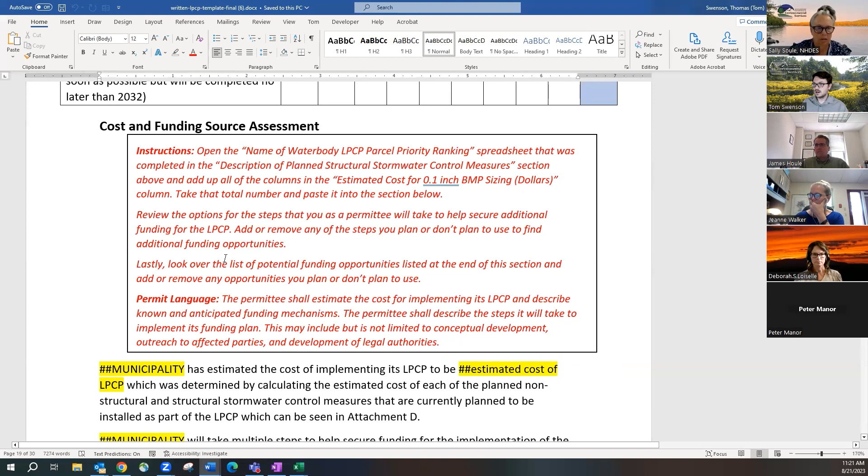Sally's going to cover the cost and funding source assessment. It's pretty straightforward in here, but I'll let her talk and then I'll show you what's within the template itself.

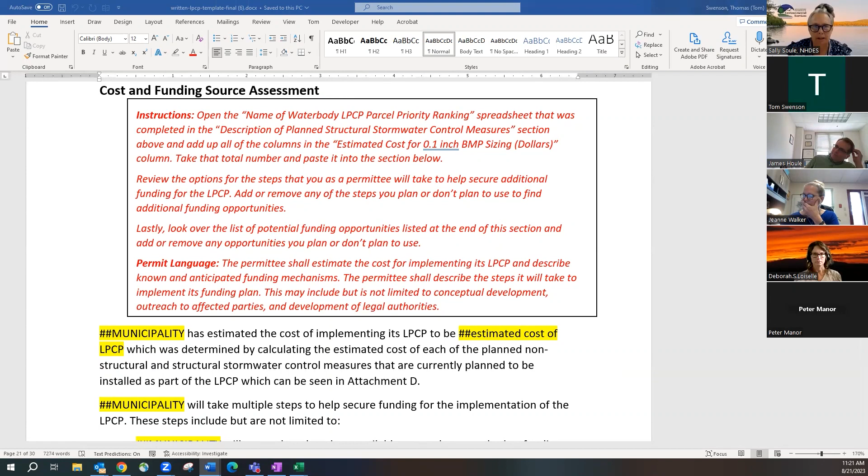Okay, thanks, Tom. So you have to develop a mechanism or describe a mechanism for how you are going to fund your LPCP implementation activities over time. And so to help with this, we've developed a list of potential funding sources that municipalities could apply to for funding to implement LPCP activities, both structural and non-structural. That list is contained right here in the template.

The only caveat I would say is that sometimes funding sources change through time. So this is only as good as today. So you may need to check over the years to make sure that some of these funding sources are still available.

So as you can see, Tom is scrolling through a list of potential places where you can find funding to implement projects. These may or may not be known to you, but these are basically state and regional grant programs that offer funding for various activities that may be covered through your LPCP activities. So Clean Water SRF, the Charitable Foundation, Water Quality Planning Grants through NHDES, ARM,

and then there's a space where you can add additional funding sources that you're aware of, or if you have municipal funding sources like your CIP, or if you happen to have a utility or a lake district or something like that, that could fund these activities, you would add them into the template there. But we started you off with some assistance by just listing out some potential sources that you might apply to for funding.

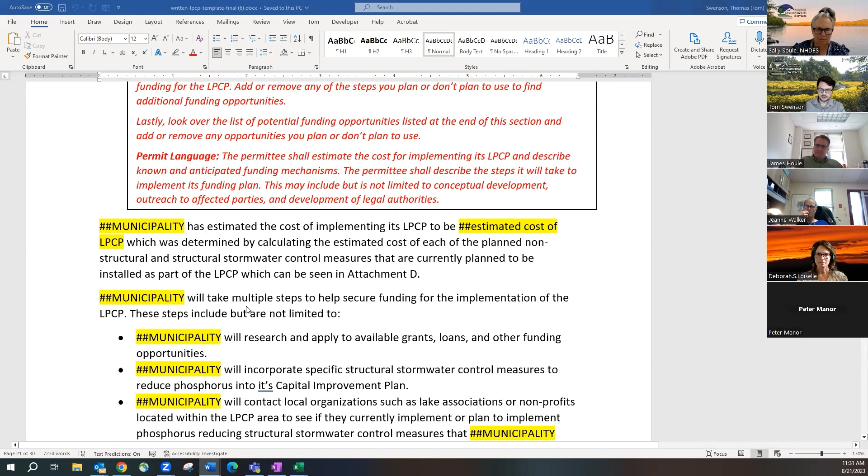So in terms of other things in the cost and funding source assessment, I know we're going over, but I'll make this quick. You're going to want the estimated cost of implementing the LPCP, and that's why in your structural ranking spreadsheet we put the estimated cost here. So if you decide to implement these structural BMPs, you just want to add up the cost and put it right here.

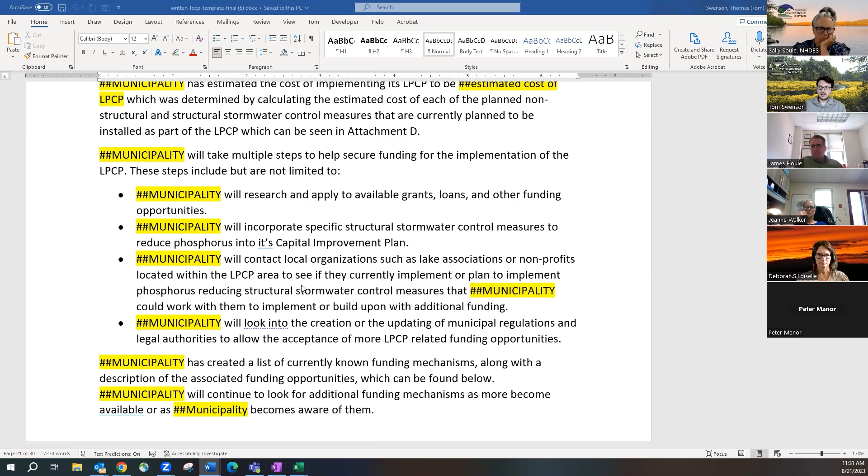This section talks about things the municipality will do to secure funding: researching and applying to available grants, incorporating specific structural stormwater control measures to reduce phosphorus into its capital improvement plan, contacting local organizations like Lake Association nonprofits to see if they want to collaborate, and looking into creating or updating municipal regulations, which could be a stormwater utility.

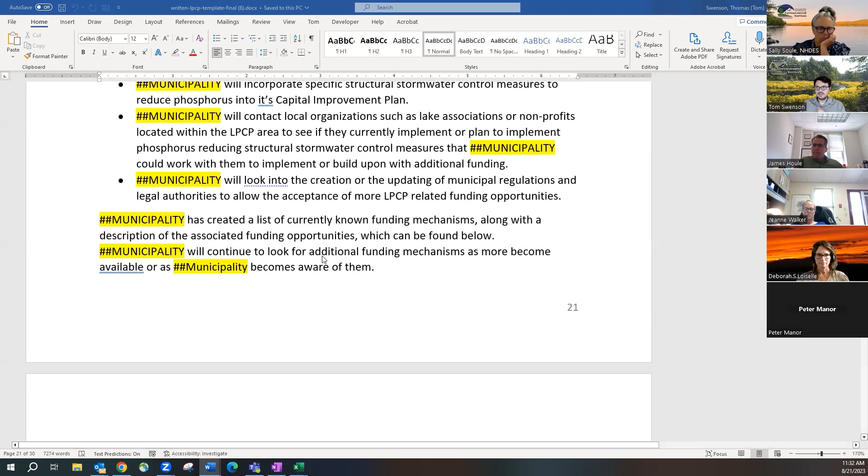So that's just some stuff you need to fill out. The rest of this you can leave in, or remove if you're not going to look into it—these are potentially optional assistance, grants, or funding sources. After that, you just go into your appendices. So that's the entire template itself.

I just have one or two little reminders, and then we can throw it out to all of you if you have additional questions.

Just want to remind everyone not to remove entire sections, because they're in there for a reason and they are requirements. Removing the red text or choosing an option is good, but do not remove an entire section.

Don't panic that you have to have everything implemented right away. Again, these LPCPs do not have to be fully implemented until year 15, which is 2032. There is that one requirement due in year 6 for the implementation of all

non-structural stormwater control measures. We will definitely be touching base on this again within the coalitions to talk about this, so this will not be the last time you hear about it.

Please take your time going through the template, because it is beefy. There's a lot of requirements. So take your time, look at it, get to know it.

We already have that language in the annual report templates for year 5, saying that we will submit them in year 6. So you have time to complete this. Please don't panic and think you have to finish it right away.